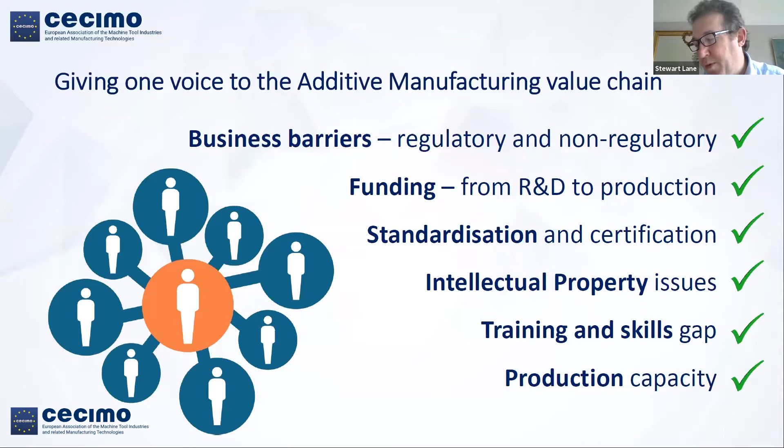And it's through this experience that we as an organization have taken it upon ourselves to do what we can to try and tackle these issues through our work groups, publications, lobbying and awareness events. Today's webinar will focus on how to use AM to make businesses and their supply chains more resilient and mitigate risks caused by sudden disruptions like the COVID pandemic.

As Europe moves past the most acute phase of the pandemic, and I genuinely hope that is the case, and we start to look at our recovery plan, many businesses are having to look at the reliability of their supply chains and also to mitigate risk. And as we know, our supply chains are only as strong as their weakest links, and some of those weaknesses, in my opinion, at the moment are being sorely tested.

Beyond the immediate need for supplies, questions are being raised about the risk inherent in our various supply chain structures. Over decades, our supply chains have globalized, they've specialized, they've become cost effective, but this does expose business to risk in the case of, shall we say, a breakdown in cooperation. And the supply chain disruption is hard to predict. Many companies are going to have to rethink their approach to try and maintain their operation.

Using AM could support traditional supply chains during times of need to give flexible and on-demand solutions, as we saw during the pandemic, and allowing for a substitution of parts as well as on-site production of critical items. Which takes me on to my next slide, thank you, Vincenzo, which is how, in my opinion, should a company look at adopting AM into their supply chain.

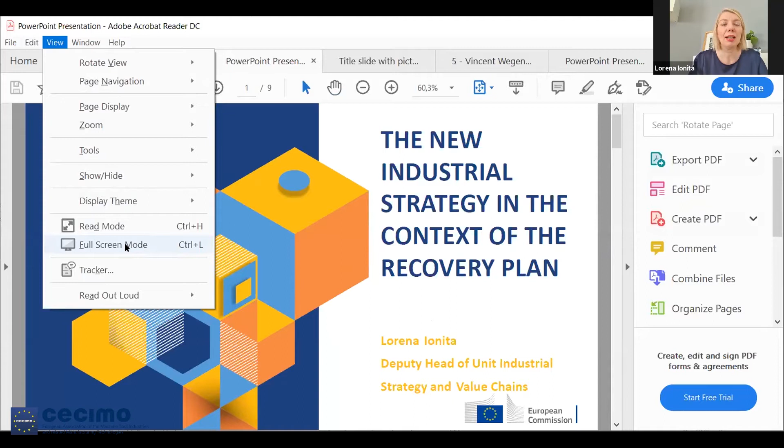So I'm Lorena Ionita, I'm the Deputy Head of Unit of the Unit Industrial Strategy and Value Chains in DG GROW in the European Commission. And I have a few slides. I will go quickly through them because I think I'm only allocated 10 minutes. And it will be about the industrial strategy, but in the new context of the recovery. And I will try to point out throughout the slides the issues which are more relevant for the AM sector. So we can already start and go to the next slide.

Well, the first slide is just a recalling of what are the key priorities of the industrial strategy from 10th of March. What we see with the crisis and now with the recovery plan that the Commission issued on 27th of May, and of which I will also speak, is that we see not only confirmation that the priorities from the March industrial strategy are still valid, but on the contrary, we see a need to accelerate these priorities and put them faster into practice. And these are especially linked to the green transition, to the digital transition, and the global competitiveness.

And we see now the recovery as an opportunity not only to repair the short-term damage from the COVID crisis, but also use the recovery as a transformative process and accelerate the digital and the green transitions of the European industry. And I know CECIMO is also keen in seeing a quick delivery and implementation of the industrial strategy. We can go to the next slide.

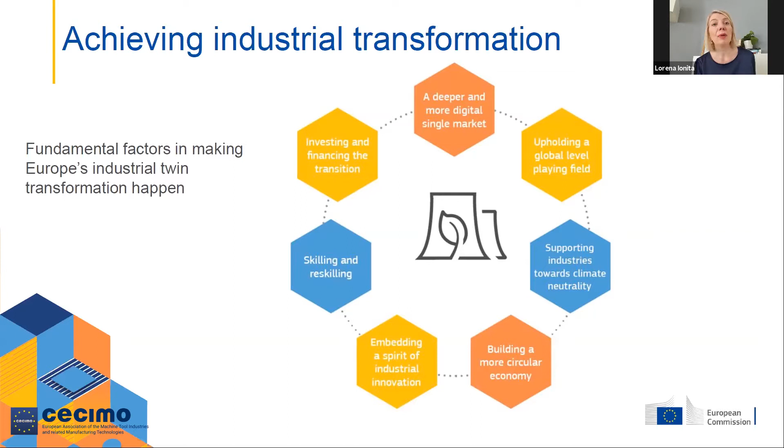Basically, the industrial ecosystem brings together all the players in a value chain, whether it's large companies, SMEs, service providers, suppliers, public authorities, research community, academia. We have also worked with this concept of the ecosystem during the crisis, and now I will speak about the recovery plan and also in the context of the recovery plan. Why is this important?

Because we have seen from the crisis how interdependent member states are in the single market and how important the value chains are in Europe, because if parts of the value chain are spread all over geographically, they can be in any country, and if parts of the value chain do not function—for instance, if there is a factory stopped in Hungary or in Poland—the whole ecosystem cannot function.

So we have seen with the crisis how important it is that the value chain and supply chains function well, and the concept of the industrial ecosystem captures well these interdependencies in the value chain and among member states.

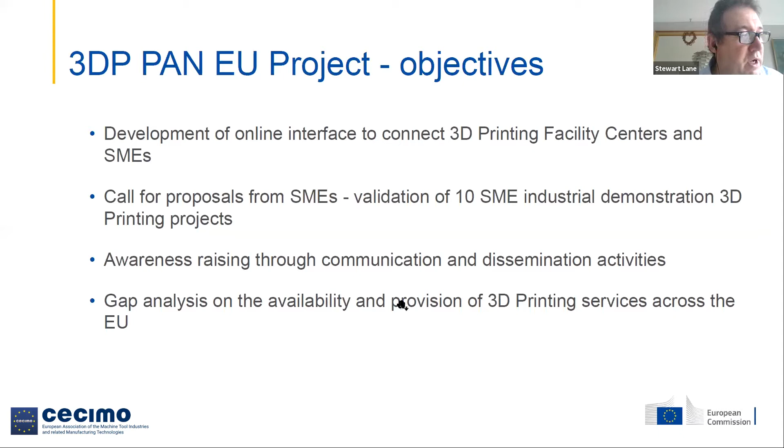You know, the introduction Stewart did - my regular job on a day-to-day is to lead the strategy and planning for the 3D group at HP. But since mid-March and over the last few weeks, I had the honor and challenge to set up a global task force inside HP to leverage our technology to address some of the biggest challenges the world has been facing over the last few decades.

And that was really centered around providing medical supplies and whatever support was needed to hospitals and health providers and communities around the world. So what I want to do today in the next 10 minutes is really to share a little bit some of the key learnings, the fundamental accomplishments and proof points that demonstrate the power of the additive manufacturing industry as a whole, and what HP has accomplished, and also speak about some of the challenges we have faced and what can be done and be used from now on to ensure that the world becomes safer, more resilient, more agile and adaptable to moments of crisis.

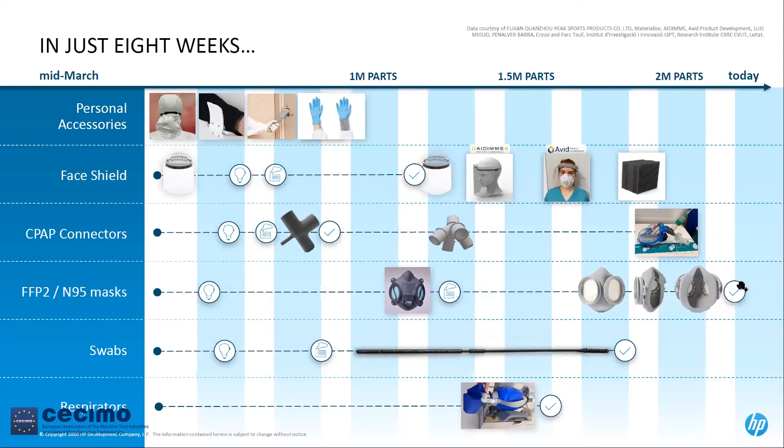Some of the key learnings we got: the first one I touched on was really this agile and very accelerated time from idea to production that 3D printing provides.

The second is this power of distributed manufacturing. As we developed these parts, we made files available on a website, and then hundreds of people started downloading and printing them on MJF around the world. A file was developed in Spain or the US, and within hours it was printed in France, Germany, Canada, or somewhere else around the world. That distributed manufacturing, that agility of the technology, was really powerful, enabling the power of the ecosystem and fundamentally enabling companies around the world to support their local communities. This repurposing of production on the spot is a fundamental capability that 3D printing provides - probably the only manufacturing tool in the world that offers that, and it's going to be a key tool for making the world more resilient in the future.

The other couple of things that I think were very important are more of soft benefits—the growth mindset of the industry. What I mean by growth mindset is the ability to adjust, come up with ideas, validate them, and work closely with hospitals and health workers. The spirit of this industry and the people in it was amazing in taking on this big challenge, stepping up, taking risks, and providing support to local communities. This speaks a lot about the innovative spirit of the manufacturing industry.

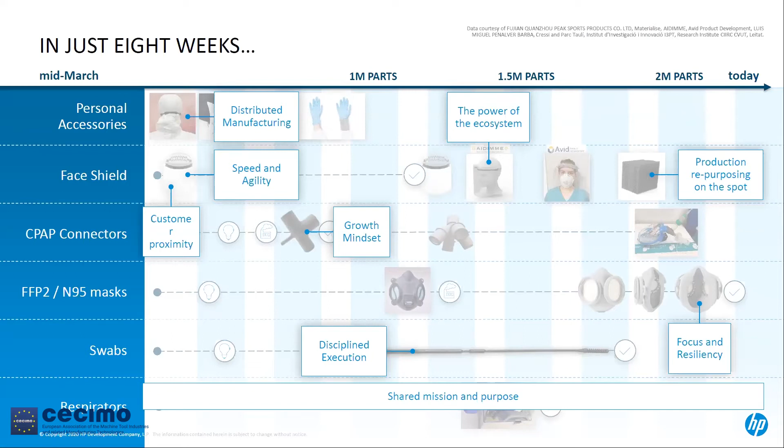On Saturday and Sunday, the parts were tested and validated, and new design changes were made by working closely with the hospitals. On Monday, we were shipping the parts. On Tuesday, the parts were also being produced in San Diego, in the US. Two weeks later, we were able to ship out thousands of these face shields around the world. This really demonstrates the power of innovation and the power of this solution.

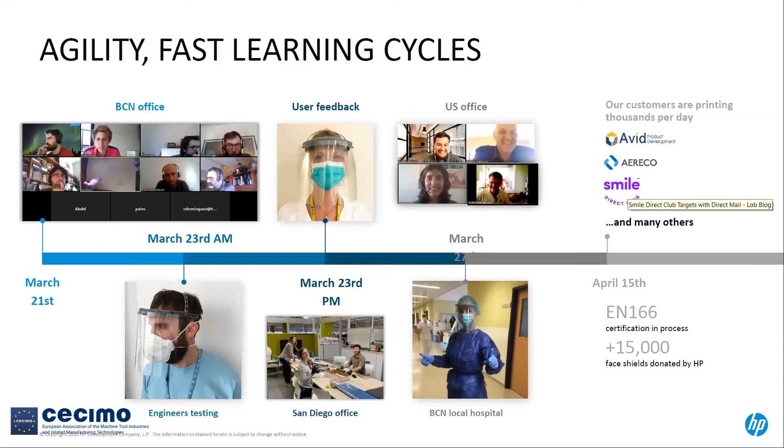The last slide I want to use is just for thought—the repurposing capacity and agility of 3D printing. I touched on this during the presentation, but as the European Union focuses more on building a different economy in the future and supports the industry, I think these are key considerations that need to be taken into account, not only by institutions but also private entities: the ability to bridge capacity in a very short time frame when traditional supply chains are disrupted, the flexibility of production that 3D printing provides, and the ability to distribute and adapt the supply chain. Whether you have one printer or ten printers, you can place them wherever you want. These solutions provide great flexibility in times of crisis and can really help solve real problems for the world.

Okay, so I will stop here. I think I used my 10 minutes of time, and I will take more questions later on.

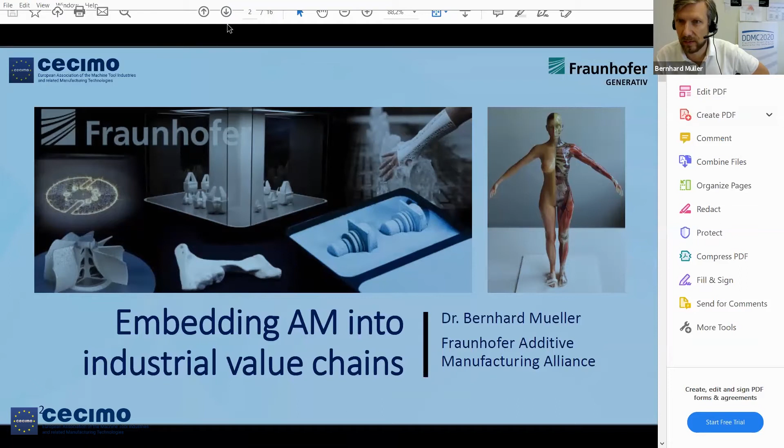Thank you, Stuart. I hope everyone can hear me. So here we go. This is the title slide as announced. My talk today is about embedding additive manufacturing into industrial value chains.

Let me start with a quick introduction to the Fraunhofer Additive Manufacturing Alliance. I'm speaking to you today on behalf of 20 Fraunhofer institutes involved in applied R&D in terms of additive manufacturing. We are clustering our research into 5 main research topics, which is engineering—about the products and solutions and their respective process chains—and materials for additive manufacturing in terms of polymers, metals, and ceramics.

It's about the AM technologies themselves—laser-based, print-based, all the technologies out there. It's about quality, which is a very important thing for industrialization of AM. And the 5th research topic is software and simulation. So you see on the map of Germany where all the 20 member institutes are located.

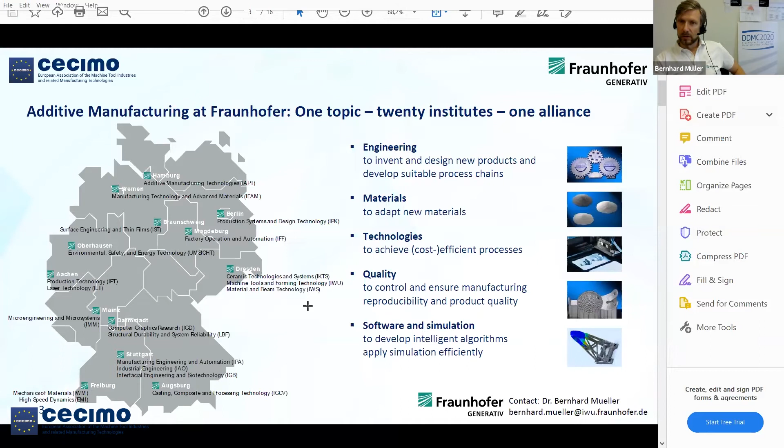On the next slide, I will also give a short introduction to our pandemic fighting activities. Just a quick introduction—all of you have seen those face shields that have been 3D printed all over the world. Just one quick example from Fraunhofer, as the Johanniter Unfallhilfe, the German St. John's Order, who has a lot of first responders who were in urgent need of face shields.

There was a call from the German Medical Goes Additive platform and network to support this need of 5,000 face shields. In a very short period of time, only about 2 weeks, Fraunhofer took up the call and was able to provide more than 500 out of the 5,000, involving 6 of our 20 member institutes. You see some impressions on the slide here.

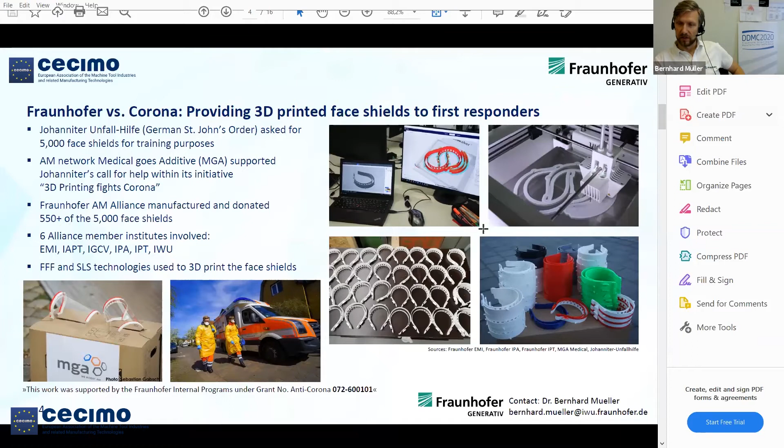Another interesting approach to increase the output was by our colleagues from Fraunhofer IML. They re-engineered an open source file for a face shield to optimize it for polymer laser sintering. As you can see in the picture here on top, they were easier to stack, and this way they were able to increase the output of one single laser sintering print job from 60 to 500 face shields.

By doing this, they themselves at IML were able to provide 1,500 face shields, and they also provided the 3D file open source for everybody to make use of.

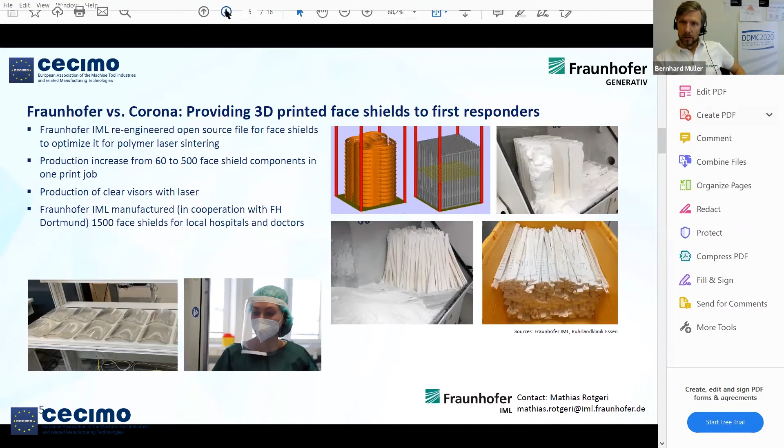So coming to the actual topic: how can we embed additive manufacturing into industrial value chains? There are several projects with Fraunhofer involvement, and three of them I would like to introduce to you.

The first one is our Fraunhofer internal lighthouse project, Future AM. This was started a couple of years ago, and it addresses main topics that are today's hurdles to real industrialization of additive manufacturing: digitalization of AM along the entire process chain, increase of build rates and component sizes, and in-process monitoring for quality control.

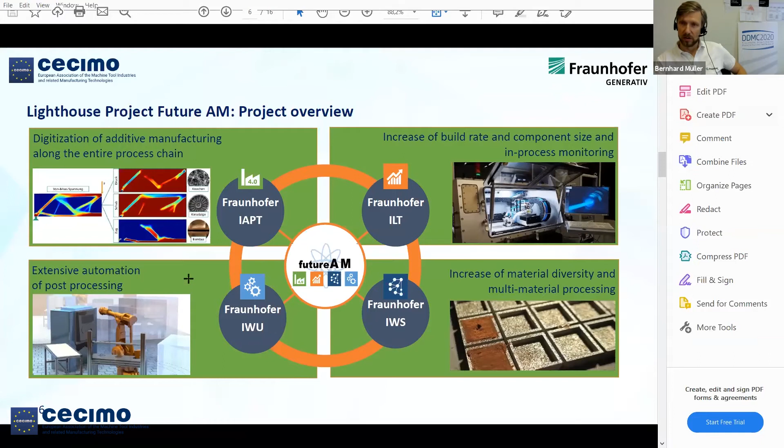It's also about the increase of material diversity and multi-material processing in AM, and about the automation of the entire process chain, especially the post-processing.

If you look at the process chain from design through manufacturing, heat treatment, post-machining, up to the finished part, it can be found that up to 70% of overall component costs are sometimes caused by post-processing. Today this involves a lot of manual work for component removal, support structure removal, mechanical processing, and so on, and there is no integration yet into industrial manufacturing environments.

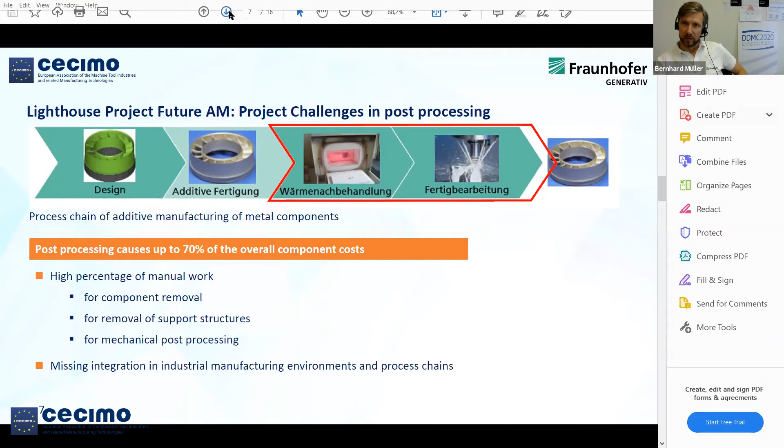This is being addressed by this project. We are developing an autonomous manufacturing cell, aiming at reducing labor costs by 50%, production time by 50%, and post-processing costs by 70%. It includes the entire post-processing from powder removal to mechanical post-processing, and the part of component identification is quite a crucial one.

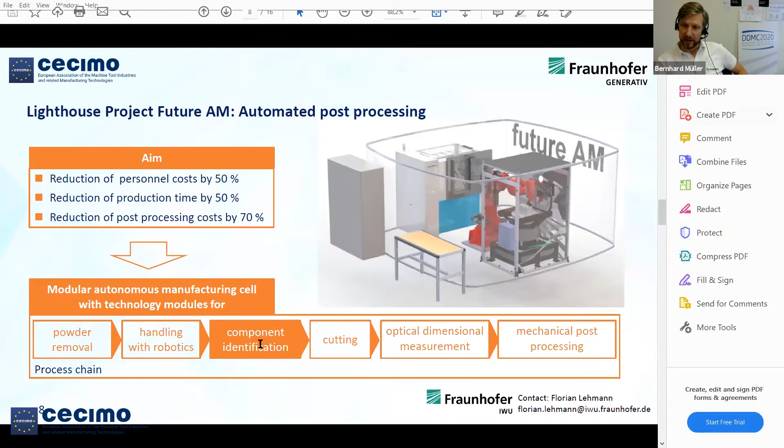I'll tell you a little more about our activities there. 3D printing, additive manufacturing, provides the possibility to integrate identification strategies into the component itself, and this has been addressed in the project. You can see here how you integrate the code into the component; you can read it out later, and the readout technologies are able to decode the data and assign it.

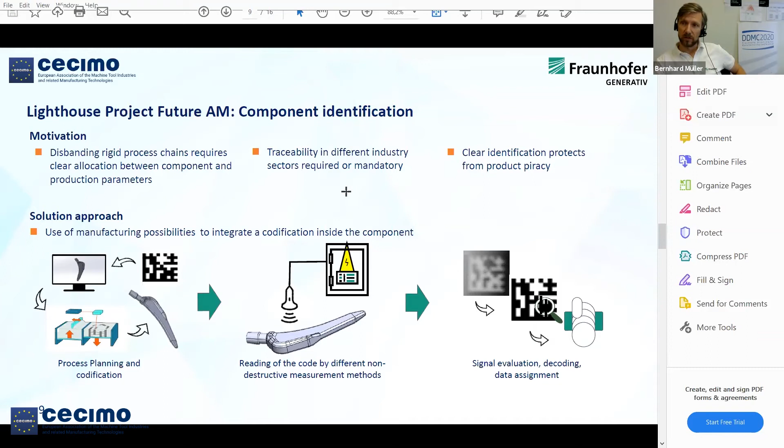This serves many purposes: clear allocation of component and production parameters, and traceability in different industry sectors. In many sectors it's required or even mandatory, like in medical applications, and it's also about fighting product piracy.

We investigated different types of codes. They were introduced into demonstrator geometries, in this case a hip stem from the medical sector, and three technologies have been investigated for readout: eddy current, ultrasound, and computer tomography. At this stage, we are investigating with industry partners which of the technologies are most suitable without causing any extra time in the process chain.

We don't want to lose time through readout of information along the digital process chain, so industrial requirements are right now the focus of further development within that project. If you're interested, please contact me or my colleague Markus Oettel — we are still searching for industry partners to provide us with their requirements.

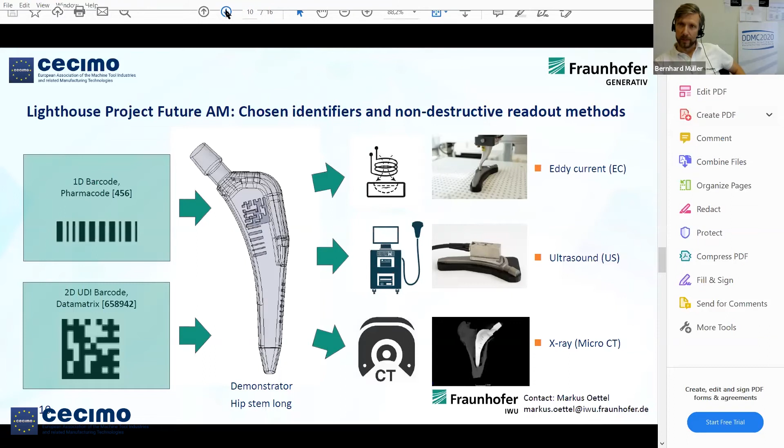Another example, also with a link to Corona or any other type of crisis, is this project from our member colleagues from IAPT. It's about the development of a mobile production line for medical equipment facilities in crisis regions. This addresses three stages: data management specifically for those medical equipment parts, for example face shield components, but it can be others too; and on-site production in the crisis region using augmented reality and a container format to easily transfer the unit to any place in the world.

It's also supposed to provide quality assurance tools like QR codes and augmented reality supported part checking, up to sterilization and packaging, which is important to deliver medical equipment in the state needed in hospitals and so on.

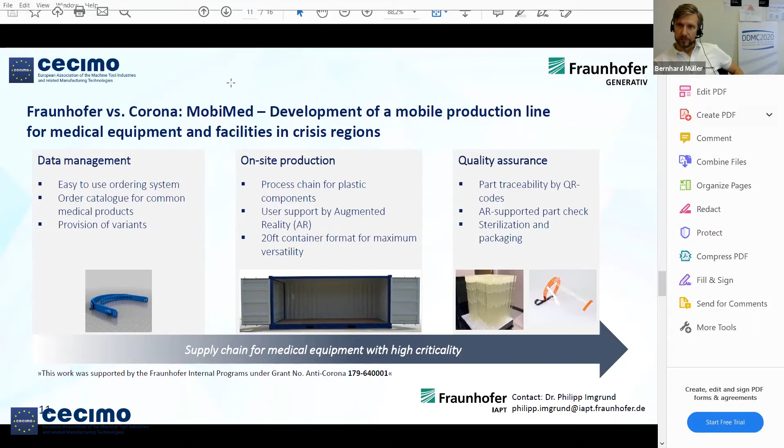The two last projects I would like to share with you are the projects that are funded by the German Federal Ministry of Education and Research in their call on industrialization of additive manufacturing. The first one is called IDEA, Industrialization of Digital Engineering and Additive Manufacturing. This is focusing on metal additive manufacturing. It's a large consortium of industry partners and research institutions.

And as you can see here in the entire process chain, all the individual process steps from design and modeling to the final part control. Today, it has to be stated that it's mostly isolated, with a large number of manual operations, and this project is addressing to really integrate this into a production line for additive manufacturing, and in the end, addressing all the needs of a real industrial production.

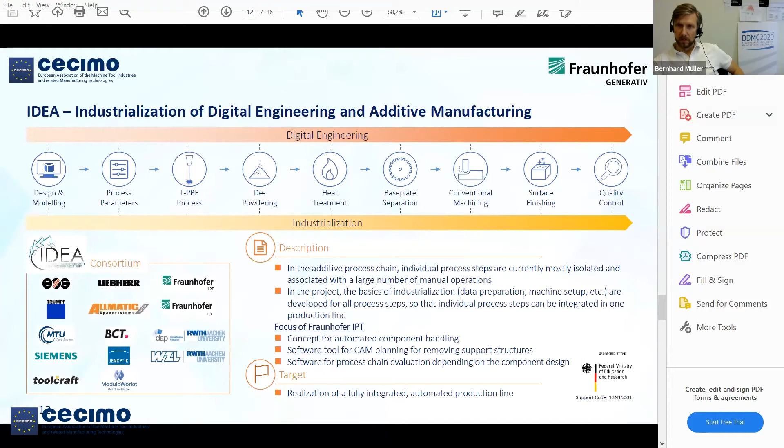So the focus of our colleagues from Fraunhofer involved in here are on automated component handling and support structure removal and process chain evaluation, as you can see here. So component handling is very crucial, as we also found out in the Future AM project I was introducing to you earlier. So it's about developing a methodology for this.

Regarding the support structure removal, it's about software development. How can we easily address the removal, mainly CNC based, of the specific typical support structure for metal AM components. And the third part is the software for the automated process chain evaluation.

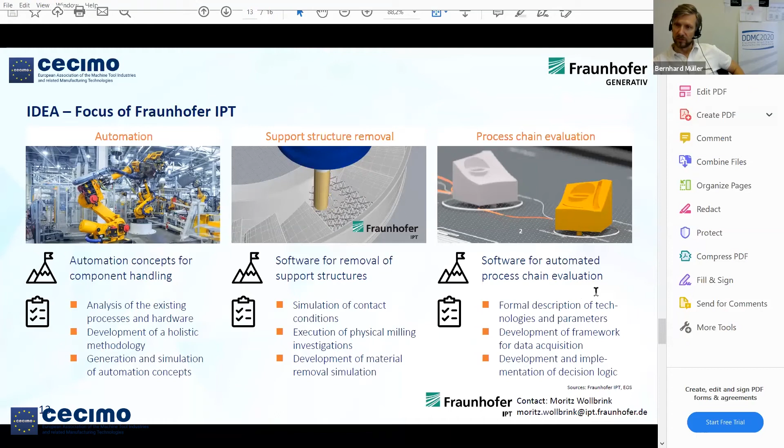The second project, which is very similar, as you can see also here in the target description, to the IDEA project, is the Polyline project. As the name addresses, it's about polymer additive manufacturing. The consortium is similarly large, and so this is addressing the same issues. The vertical and horizontal integration of AM processes today is lacking, the industrial needs and the standardization.

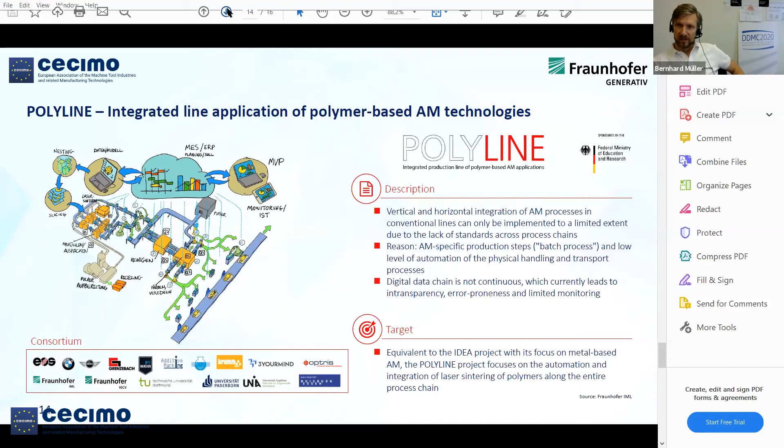So we are today talking of a batch-like process and low level of automation, and a lot of manual and physical handling of transport processes. And this is all addressed in that project specifically for polymer AM, specifically laser sintering. The next slide also underlines our research activities in here.

Our Fraunhofer IML colleagues are focusing on the integration, on a basic integration concept, and on the material flow. They are material flow specialists, and the specifics of the AM material flow are addressed in that project. The colleagues from Fraunhofer IGCV are focusing on the digital process chain,

and concepts for that, and last but not least, also the quality and the technical cleanliness, which is a very important issue in conventional manufacturing, and this also has to be addressed for additive manufacturing. Cleanliness of products is crucial. So once again, if you're interested, contact our colleagues involved directly here.

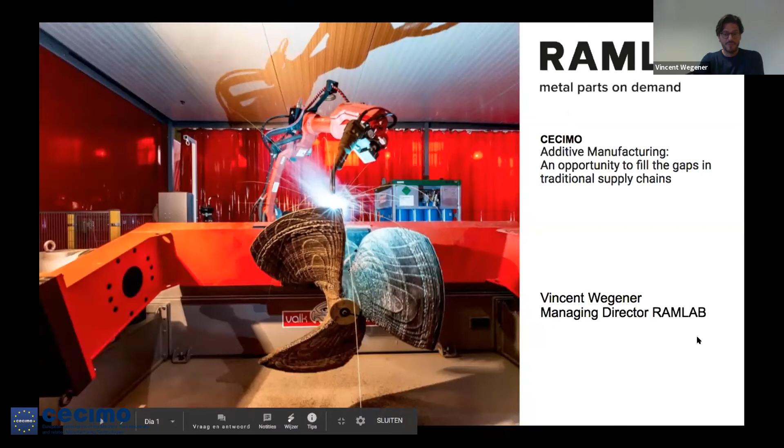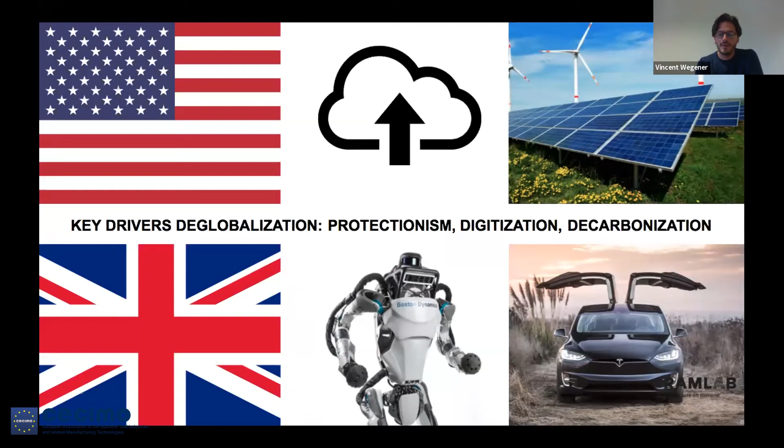Thank you. Yeah, sure. I'm Vincent Wegener, Managing Director of RAMLAB, also co-founder of RAMLAB. Interestingly, we started a few years ago with the observation that the world is actually rapidly deglobalizing, and we spotted a few key drivers that were causing that deglobalization. So it's protectionism, digitization, decarbonization, and this made us wonder here in the Port of Rotterdam what we can do about it. But then, of course, an accelerator came along this year,

which I think is accelerating the deglobalization, with COVID-19. So we here in the Port of Rotterdam, RAMLAB is funded by the Port of Rotterdam Authority, did an exercise a few years ago on what happens with the ports of the world when we no longer ship goods to one another. What's then the function? So that was one of the key reasons why the Port of Rotterdam decided to invest in setting up RAMLAB, which stands for Rotterdam Additive Manufacturing Lab.

And we can see today actually a glimpse of the future, because we saw that there was a drop of 20 to 30% in shipments here in the port, and also, of course, a huge decline in consumption of oil goods like kerosene. So it gives us an idea of what will happen if we continue with digitization, decarbonization. So we started a few years ago with the mission of, let's see if the next slide comes up.

Too fast. All right, so a few years ago, we started to focus on wire arc additive manufacturing, because we currently see the problem where the current machines out there cannot make large parts. So that's the main reason why we started with wire arc additive manufacturing.

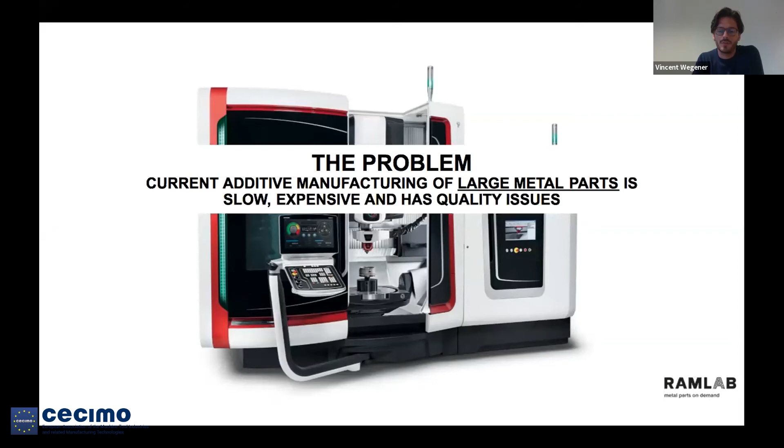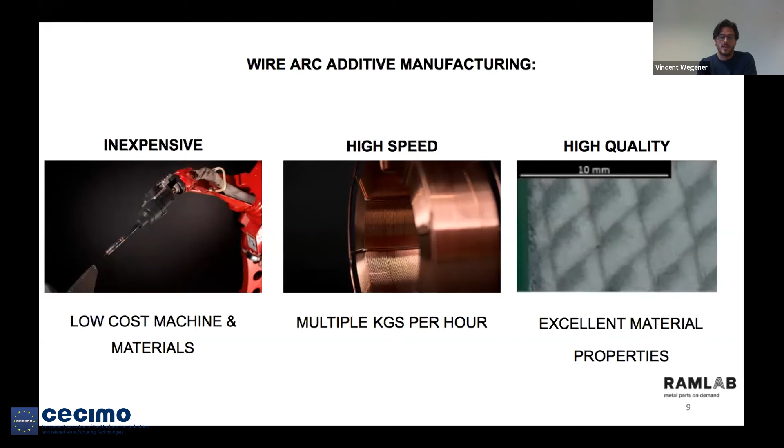Three of the benefits of wire arc additive manufacturing are that it's a relatively inexpensive machine, because you basically use a welding system. You can do a lot of kilos an hour, which is important if you want to make big parts, and also the quality is excellent compared to, for instance, casting.

So in 2017, we were able to print the first propeller in the world, which was the WAAM propeller, as we called it. We were able to print it in about 10 days straight, which was about 300 kilos. And that was an R&D project. If we would do it again, I think we could do it in 5 days, more or less. So it really shows you can make parts, large parts, on demand and locally.

And we also got the certificate from Bureau Veritas, so it was really officially certified. And more importantly, of course, for us, it was also officially recognized by the Guinness Book of World Records in 2019.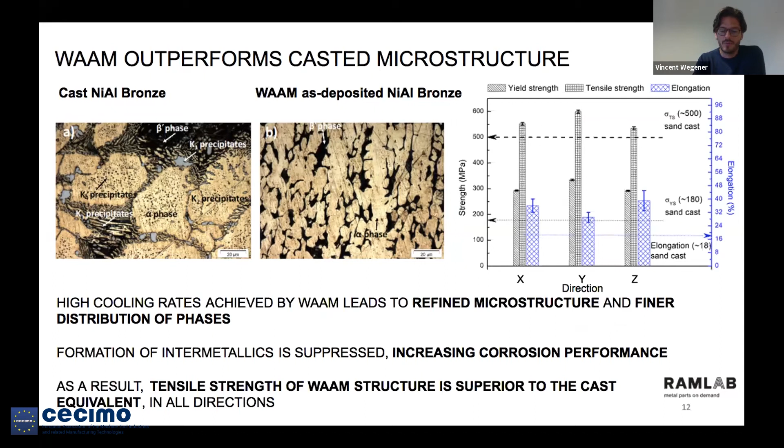So looking at wire arc additive manufacturing compared to casting, we see that it's far better, superior quality, because it has a more refined microstructure. And it's also an increase in corrosion performance, and we see a better tensile strength than casting. So it's one of the reasons to look if we can do more with WAAM than with casting, especially when most of the cast parts are coming from outside of Europe.

We also did a study on another part. This is an impeller, where we again went from design to modeling to manufacturing within a week.

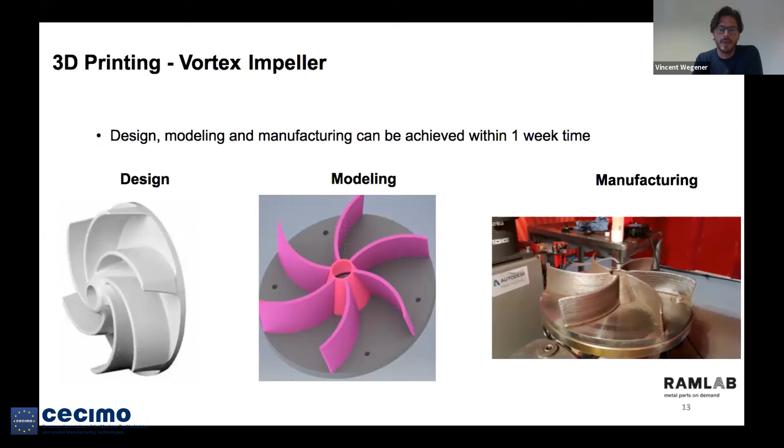Another study we did was a ship bow. This is normally a fully solid part that is milled from 120 kilos to 60 kilos. But in the end, you only need a shell, as you can see here. So we reduced it to 6 kilos. And also it can be made locally. It takes about a day to print. So it takes away all the need for sourcing, which could take up to a month or two.

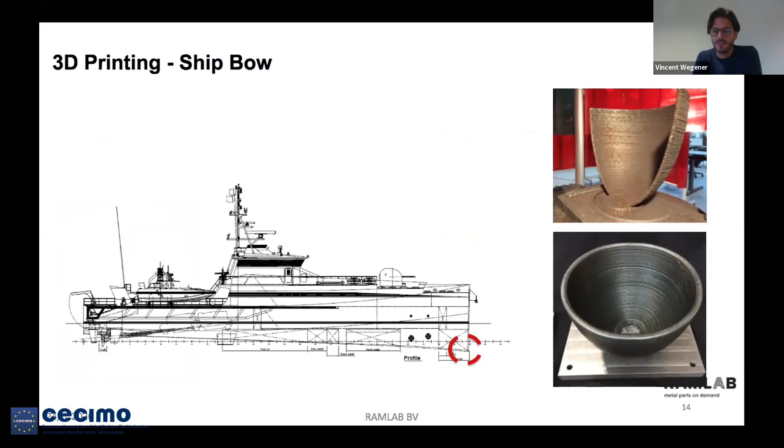Another study we did for the Port of Rotterdam is more into hybrid manufacturing. So we of course have a lot of bollards here. They break down once in a while, and then they have to be ordered. They come from Asia. They're cast over there. It takes time. So we looked into what can be done to manufacture these parts locally, and then specifically what can we do to reduce print time.

And this is one of the ways. So that's one of the benefits of WAAM, is that you can actually produce hybrid parts where you take a standard off-the-shelf tube and you print the complexity on top of it.

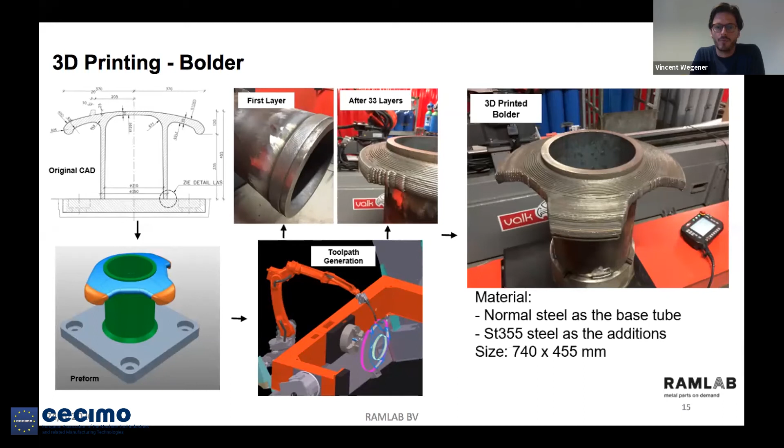And one of the other parts we're working on together with an offshore company here based in Rotterdam is a hollow hook. So normally when you cast a propeller or you cast a hook, it's completely solid. And that's not necessary. You can reduce weight of a hook by making it hollow. But it's impossible to do that with casting, but you can do that with 3D printing.

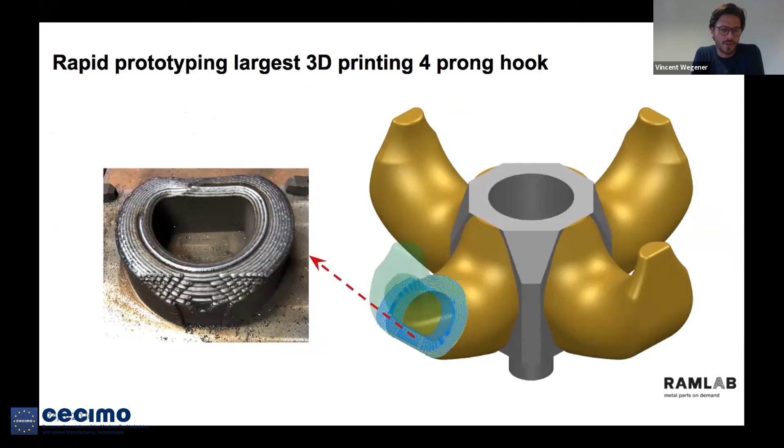So we started with partners here in the region, but we now have a consortium of many European companies, and together with them we're researching how we can accelerate the development of wire arc additive manufacturing. So we have software providers, consumable providers, hardware providers. Of course, we work together with academic partners to push the technology towards commercialization and wide adoption here in Europe.

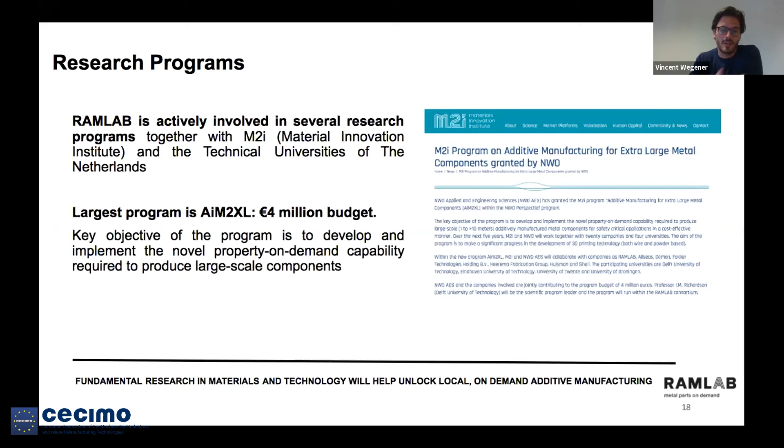So one of the ways we do that is to have a large research program here in the Netherlands where we focus on property on demand, so making parts that actually have certain properties that are better, like I mentioned, for instance, than casting.

On a European scale, we have been leading a consortium which is called Grade2XL. And Grade2XL is focused on multi-materials. So one of the benefits of the technology is that you can actually use multiple materials. For instance, a propeller where you have the inside made out of a relatively cheap material, and then only the outside is cladded, for instance, with a more durable, corrosion-resistant material.

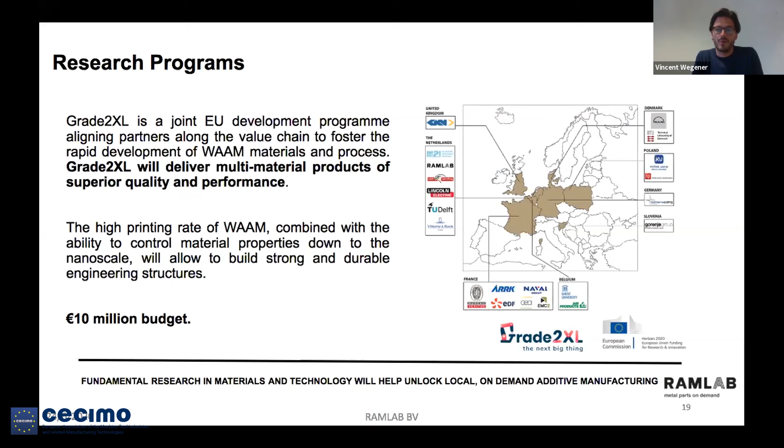This is done with a consortium, as you can see, throughout Europe, and we just started this year. But the main objective also of this project is to spread the adoption of this technology, mainly for SMEs. So also SMEs will be able, after this project, to print parts and print multi-material parts.

And then lastly, as mentioned before, digitization is of course a very important part to reduce the reliance on warehousing and moving goods all over the world. Of course, the Port of Rotterdam is one. There are many warehouses here, and studies have shown that many parts are basically shipped all over the world and then thrown away. So it's just lying there for years and then scrapped, which is of course a waste. So we should move to a digital warehouse, so we can make parts locally and on demand.

We are involved with DNV GL. They just set up a joint industry project which we've taken part in, and we also helped with writing the standard for additive manufacturing of metallic parts, specifically wire arc additive manufacturing, because without certification, without standardization, adoption of additive manufacturing will take longer. So it's important to also invest time in that.